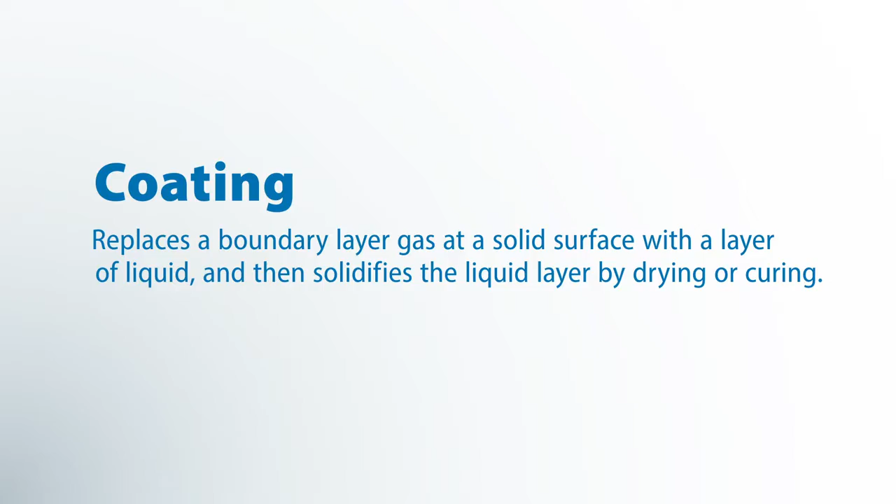So what is a coater? Well, this is a pretty good image. It's a shiny stainless steel piece of equipment. It's pretty simple in its process, but they do a lot of phenomenal things. The key to every coater is that applicator, or the coating head. This happens to be a slot die module.

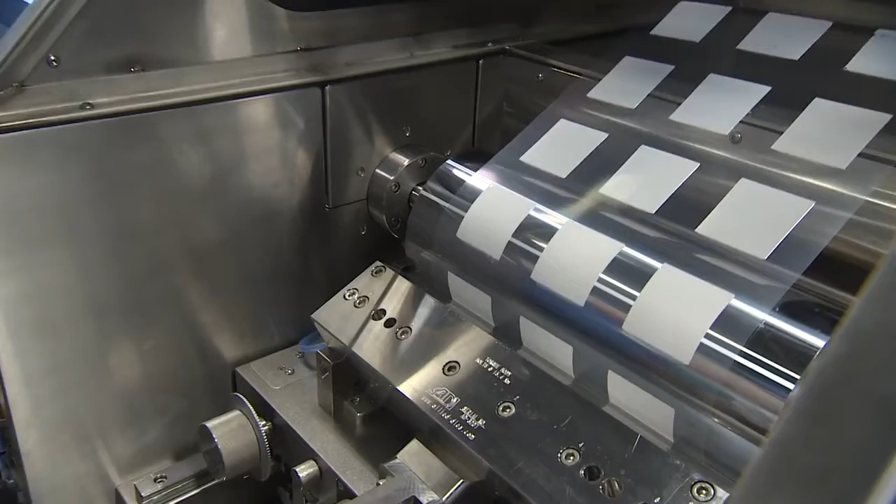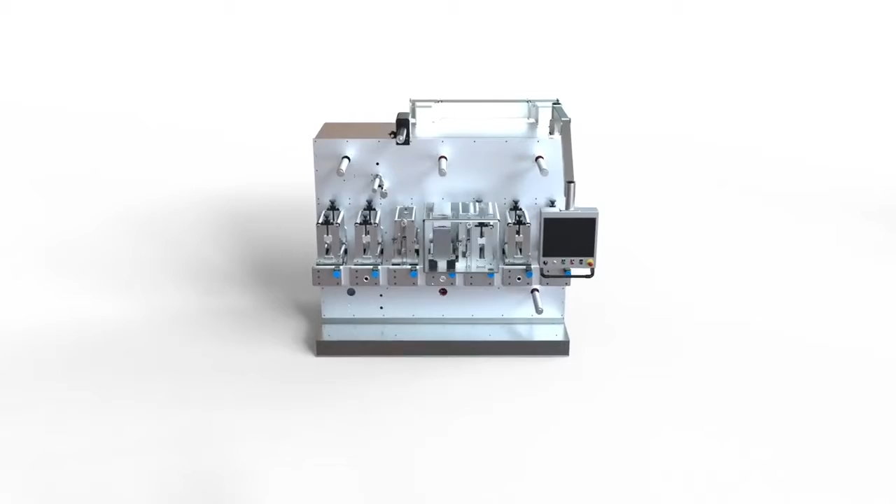There's also machines that we've built that allow us to integrate them onto a line or remove them if necessary. Every coater is going to have the same kind of features. Depending on the type of coating and the volume of coating you're doing, the machine is going to vary in size and shape. This machine is a very good example.

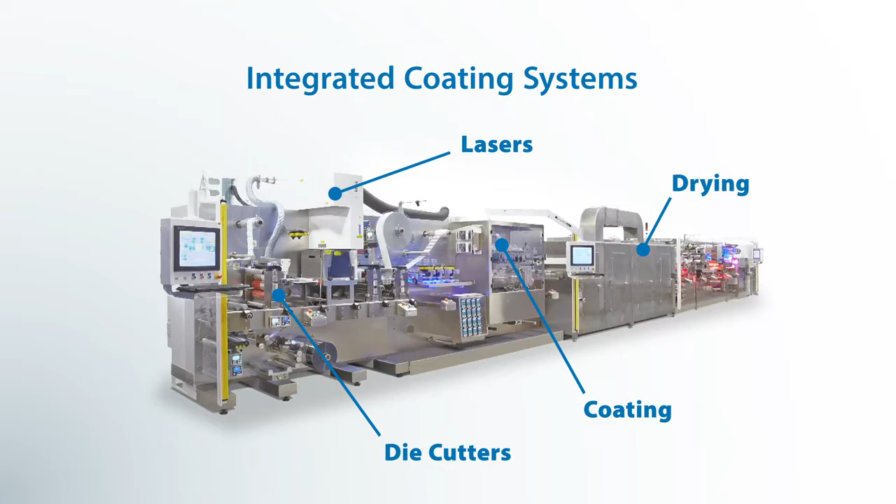We have lasers and die cutters on the start. We apply a small amount of coating midstream, dry it, and then we do the rest of the processing after that, all in one shot.

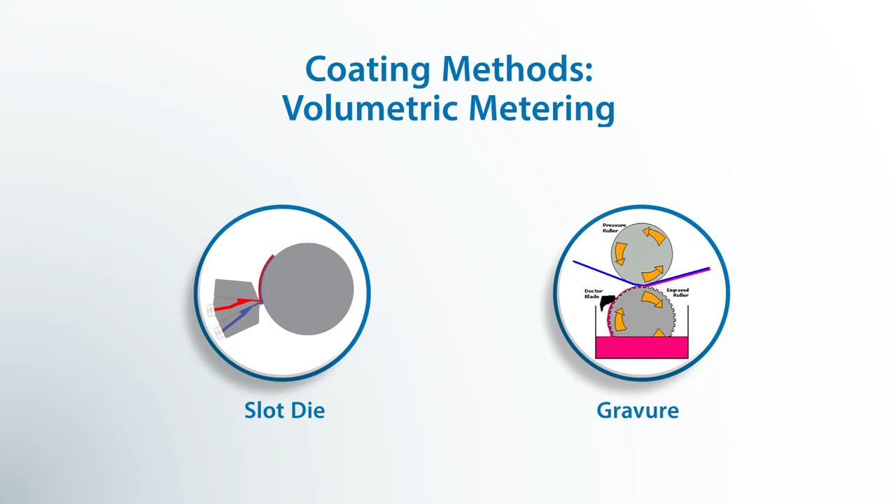There's two different methods that you use to apply that material and to control the amount of material that's going to be there. One is a mechanically metering system. Then there's volumetric metering. Volumetric metering means we are going to deliver an exact volume of material to the substrate, and that's the control of the thickness.

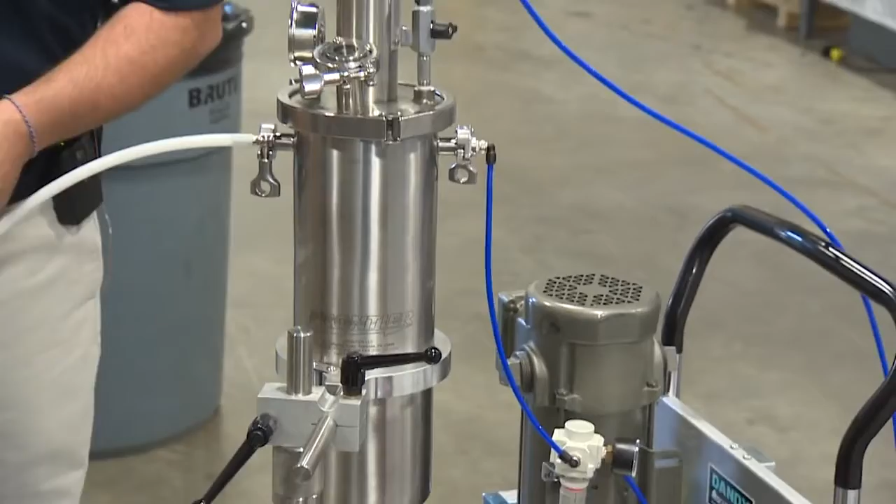So moving on from the methods to the actual fluid delivery systems that we utilize. Fluid delivery systems, in a nutshell, have a tank full of material. We've got a pump delivering to the applicator head. The fun stuff begins when we choose what pumping system we use.

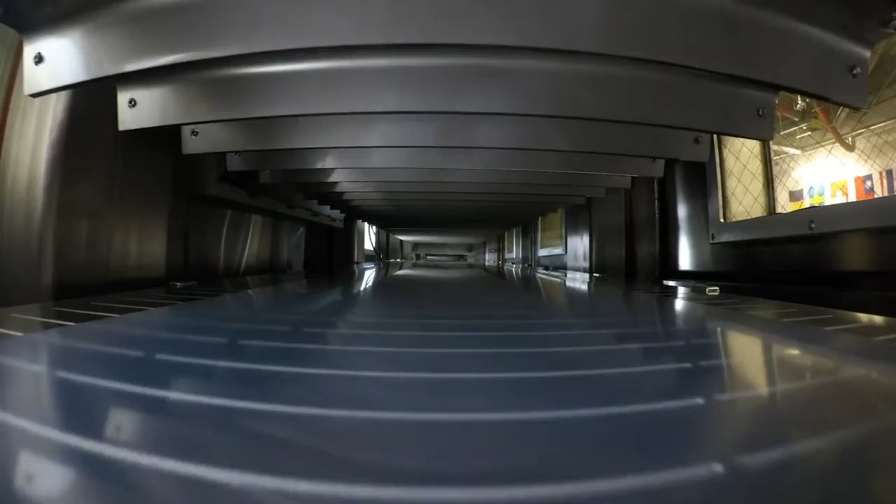The next phase of coating is the drying process. Every material that's wet needs to be dry when it comes out of the machine. The majority of the ovens that we build are flotation systems. We support the film as it goes through the oven on a blanket of air supplied from a blower system that's also providing air that dries from the top side through nozzles.

The material is heated from the back side and from the top side. There is very little friction of the material going through the oven, which allows it to be efficient in its drying process. Dryers can be in virtually any room, and it doesn't really contribute much to the heat of the room.

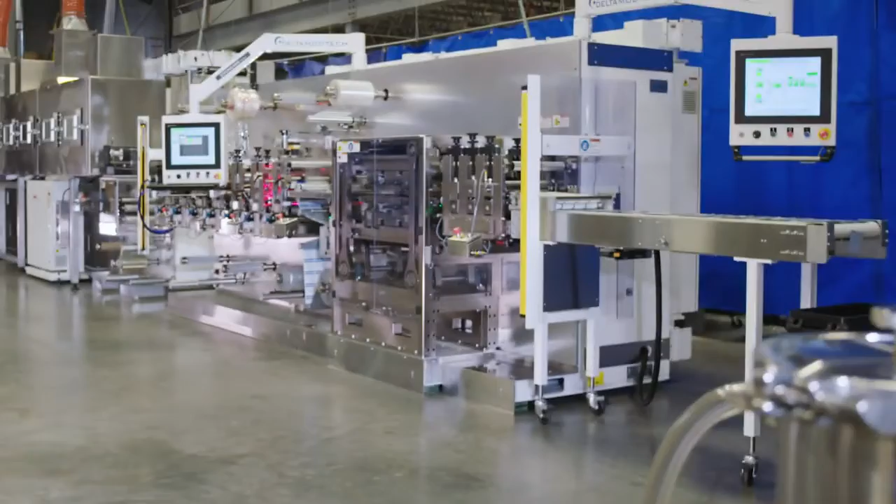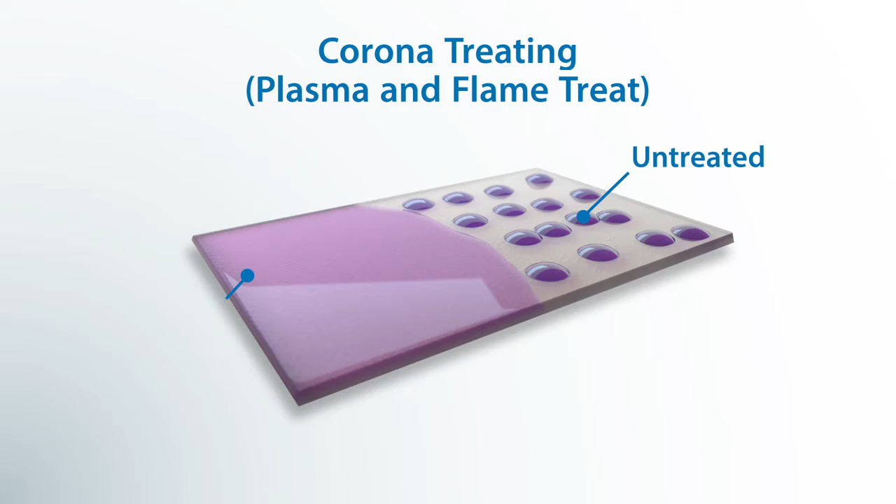Some of the special techniques that we incorporate on our coating systems—a very important one is corona treatment or plasma treatment. This allows us to control the surface energy of the web, allowing for better wetting of the liquid. Some of the other things that people are interested in is the ability to coat stripes or zones of the substrate.

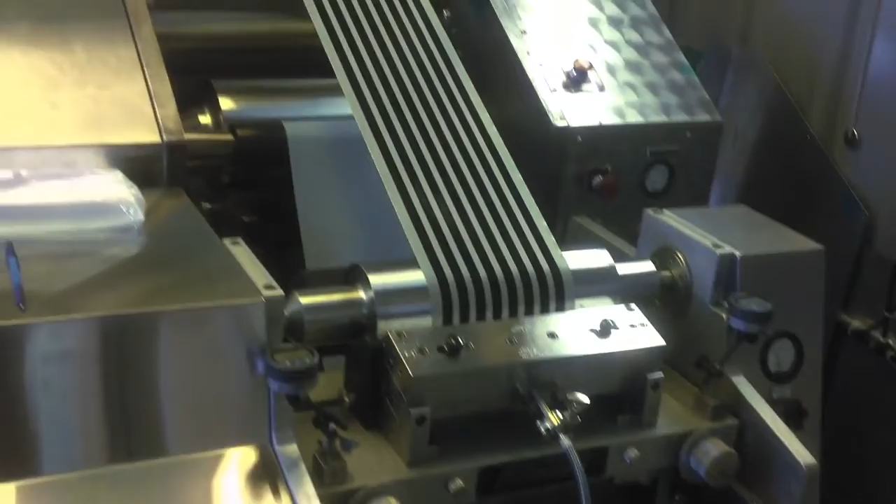Another technique is patch coating. Not only can we make the stripes, but we can also make discrete breaks in the coating before and after, and still control the coating thickness from beginning to end within a couple of percent.

One of the other special techniques that we work with, pretty much only on the slot die side, is we can do multiple layer coatings as well.